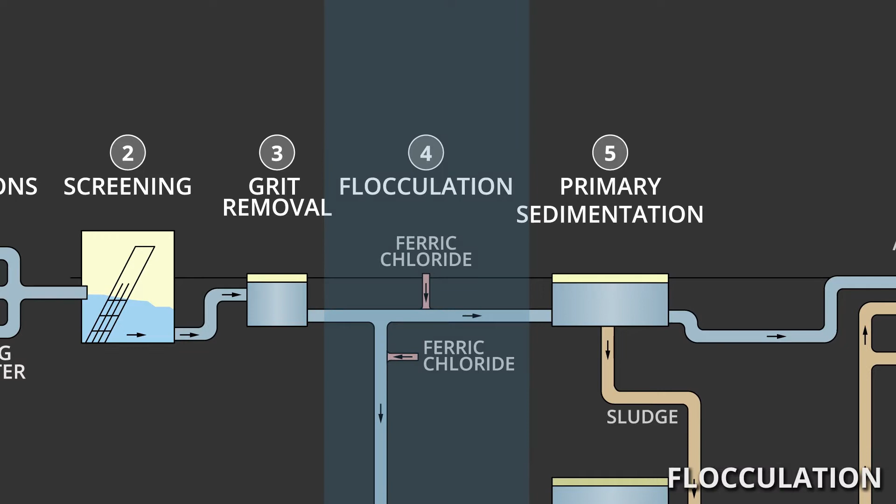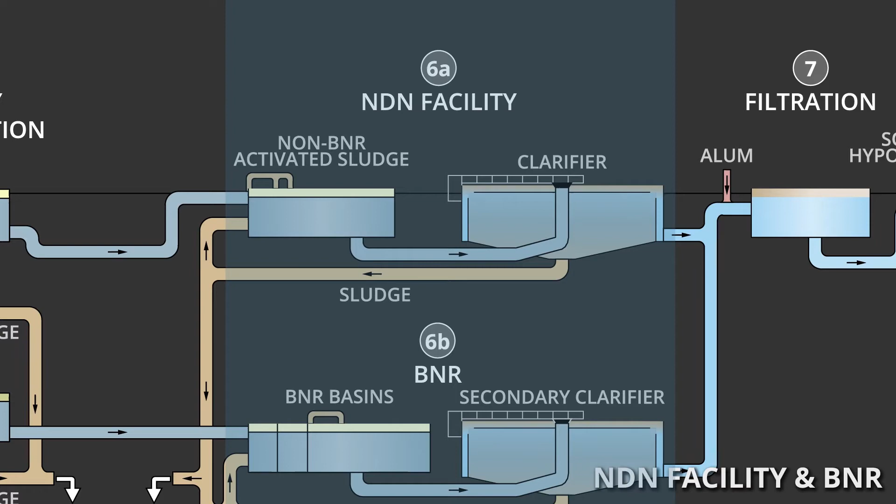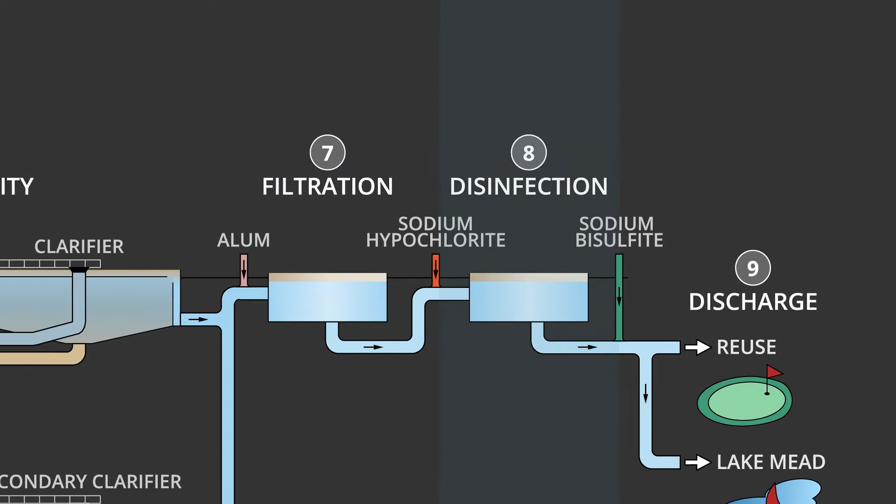Collection system. Screening. Grit removal. Flocculation. Primary sedimentation. Nitrification, denitrification facility. Biological nutrient removal. Filtration facility. Disinfection. Discharge.

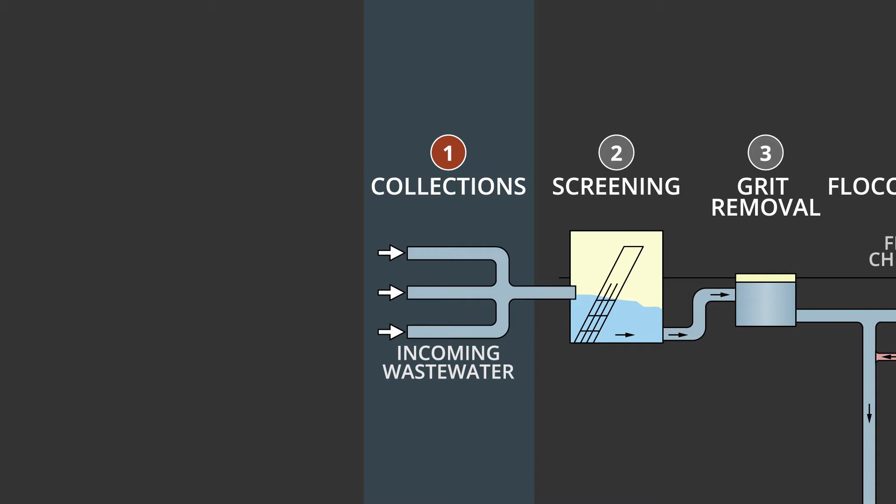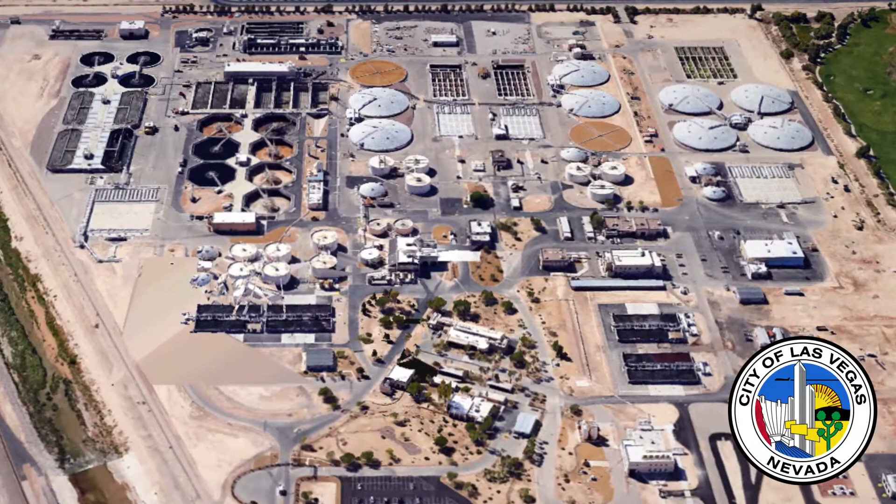Collection system. A maze of pipes collects wastewater from home appliances including clothes washers, dishwashers, kitchen sinks and disposals, toilets, and bathtubs, and from businesses such as restaurants, hotels, casinos, hospitals, laundries, car washes, and other light industries to deliver influent to the Water Pollution Control Facility.

Screening. Though this influent is 99% water, some debris also travels through the sewer and must be removed to protect equipment and the downstream process. To accomplish this, the WPCF plant process starts with the screenings facility.

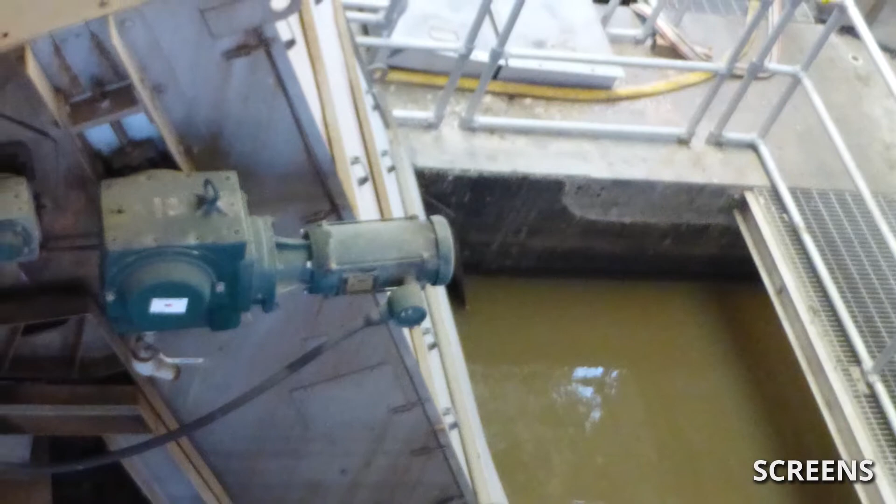This facility removes debris, including cans, rags, branches, leaves, trash, and other miscellaneous large items, when the wastewater goes through one of 5 sets of fine screens. The fine screens capture the debris contained in the wastewater while allowing liquids to pass through and enter the treatment plant, like a strainer. Debris captured by the fine screens is washed and then loaded into a truck for disposal at landfill.

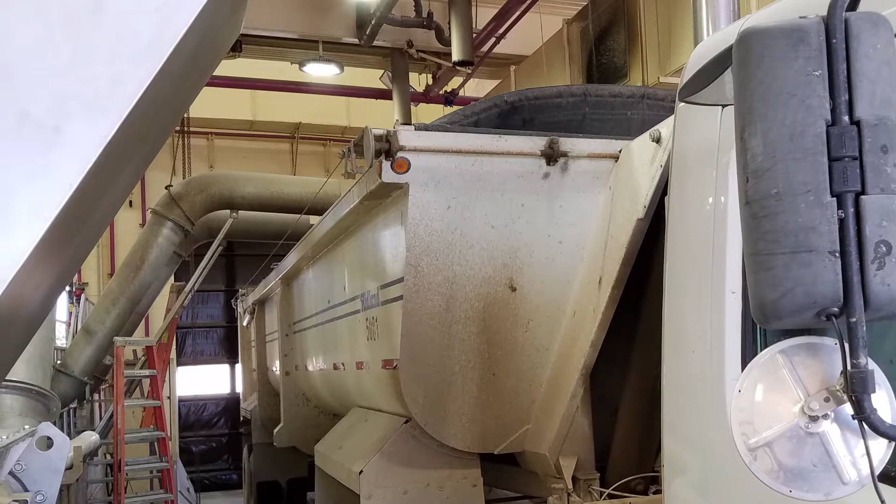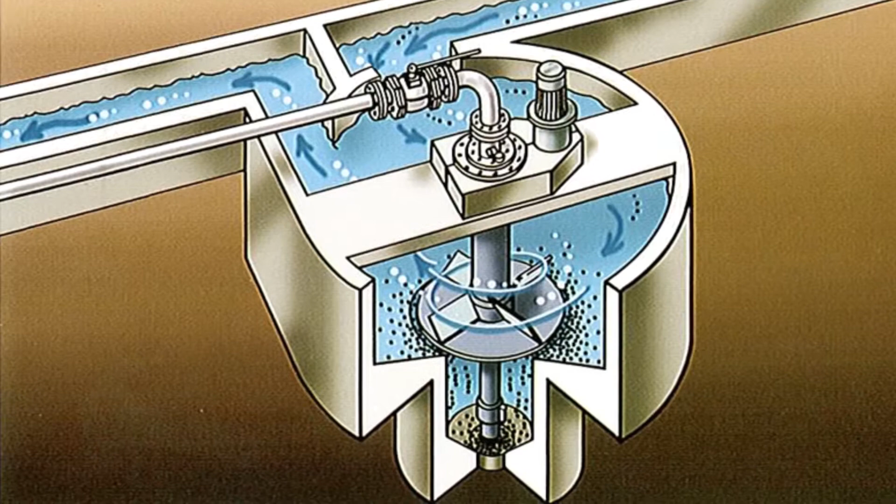Grit removal. The wastewater that passes through the screens still has very small debris like sand, gravel, and other material referred to as grit. If not removed, the grit could damage equipment, such as pumps, or settle out downstream and create clogs. The WPCF uses round grit removal chambers that spin the wastewater, creating a vortex that allows the small debris to separate from the wastewater. The sand and gravel is then washed and loaded into the same truck as the screenings and taken to a landfill.

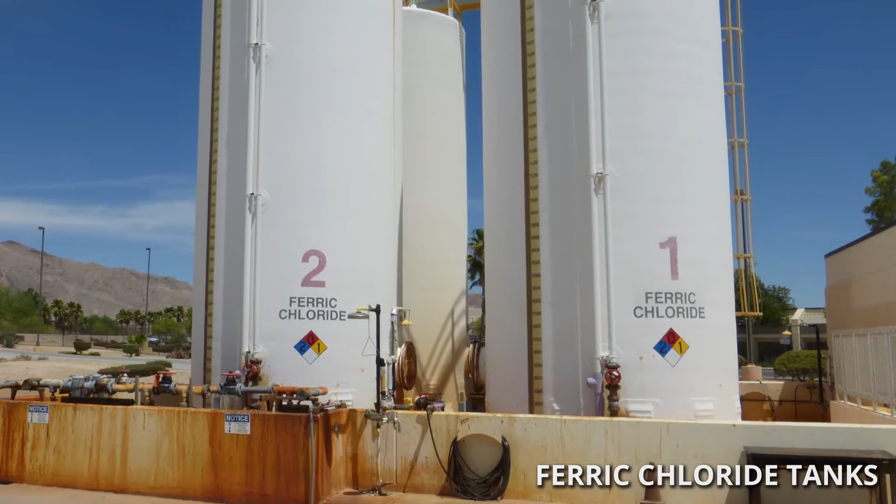Flocculation. Ferric chloride is added to the wastewater at this point to aid the small particles in the water to settle. The iron salt grabs particles in the water and creates a clump. The clump is heavier than water and will tend to sink.

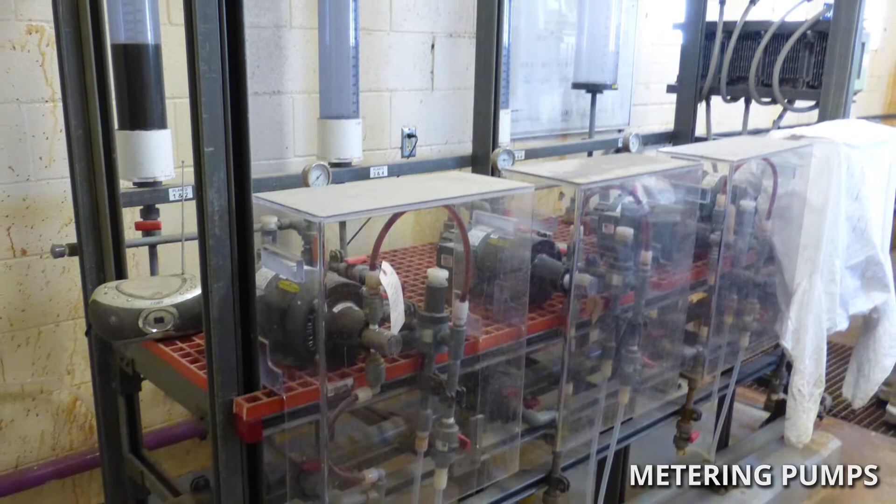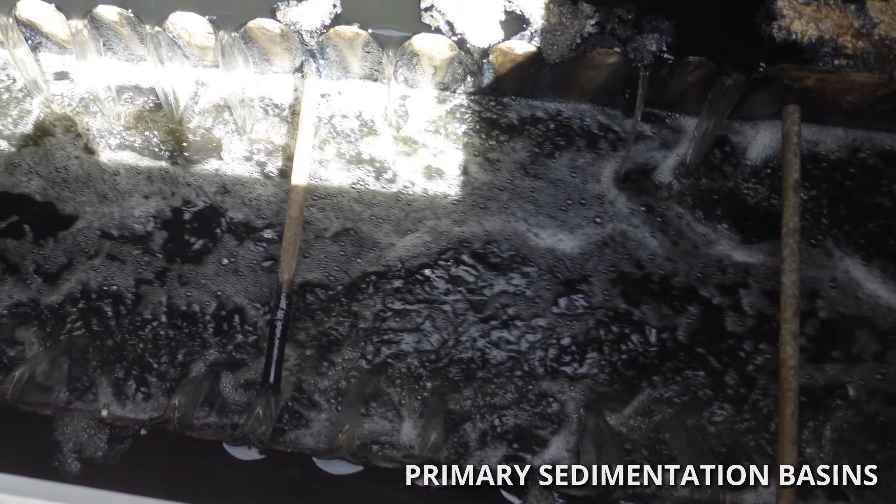Primary sedimentation. The wastewater and flocculants arrive at the primary sedimentation basin. Here, the water spreads out and slows down, like a stream flowing into a lake or pond. The slow-moving water allows the clumps of particles to settle to the bottom of the basin where it is scraped off and taken away. These clumps are now called sludge. The sludge is collected and moved to the solid side of the plant.

Wastewater that leaves primary sedimentation is now about 80% cleaner than when it entered the WPCF, and can be pumped to the nitrification-denitrification facility or the biological nutrient removal basin.

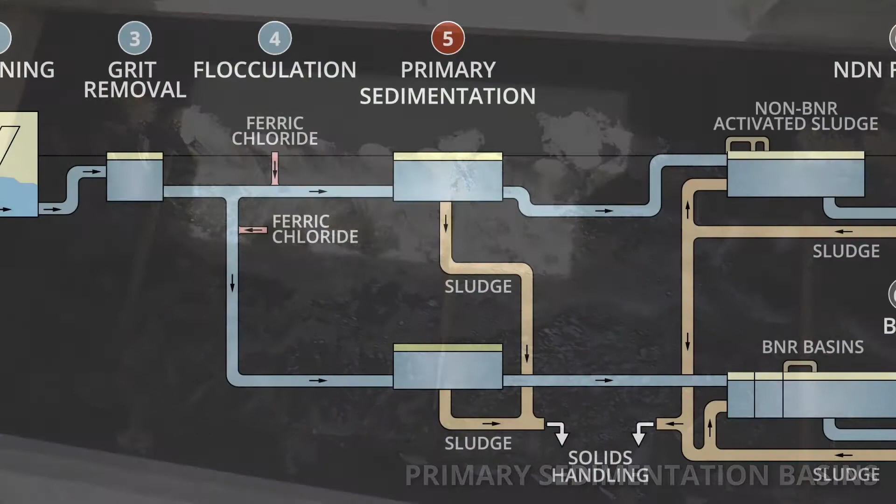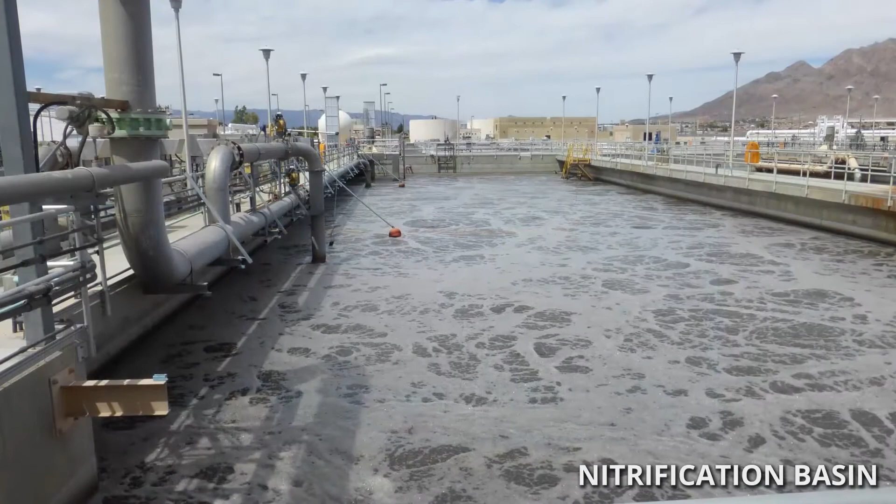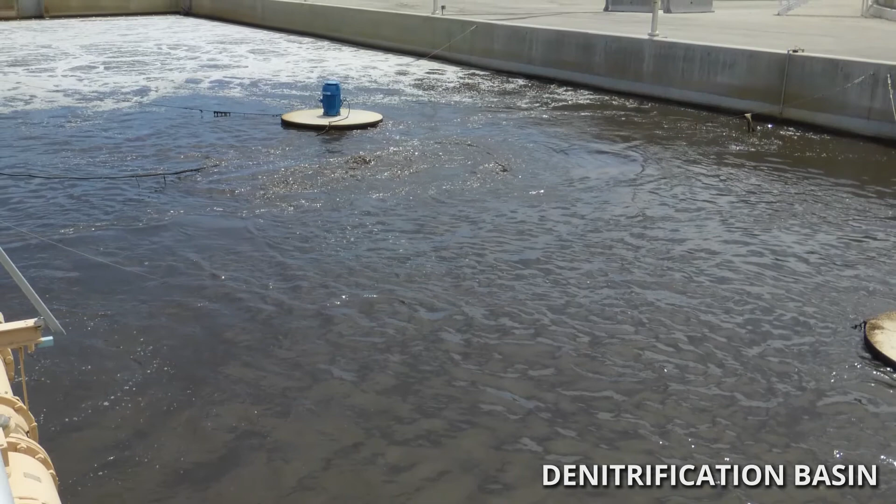Nitrification-denitrification facility. Wastewater from the primary sedimentation basins is pumped into the nitrification-denitrification (NDN) facility basins where it is mixed with microorganisms and air. Think of it as a turbulent, tumbling stream. The microorganisms eat nutrients in the wastewater for their biological processes and to grow. These healthy, growing microorganisms collectively make up activated sludge. The activated sludge gets rid of much of the nutrients in the wastewater.

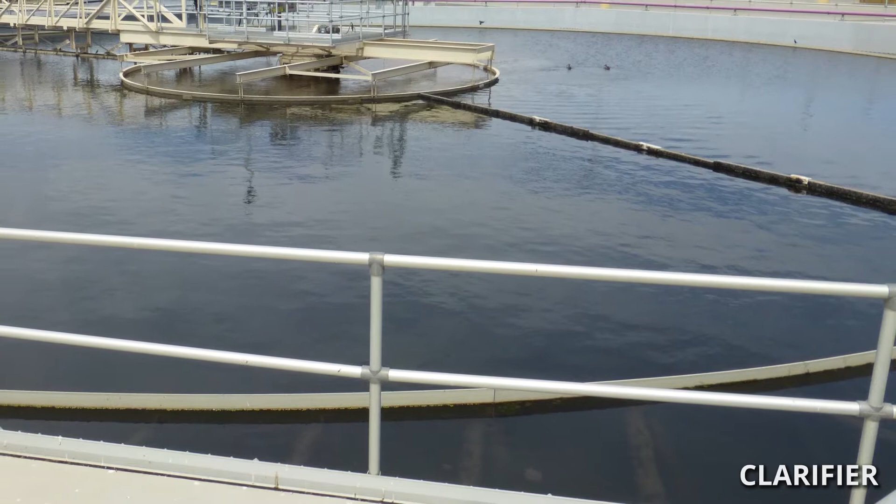After the NDN basin, the water and activated sludge flow into circular clarifiers, where the activated sludge settles to the bottom. This is because the microorganisms are full of nutrients and heavier than water. Some of the microorganisms are returned back into the NDN basins to breed more microorganisms. The rest is sent to the solid side of the plant. The result is very clear water that flows on to filtration.

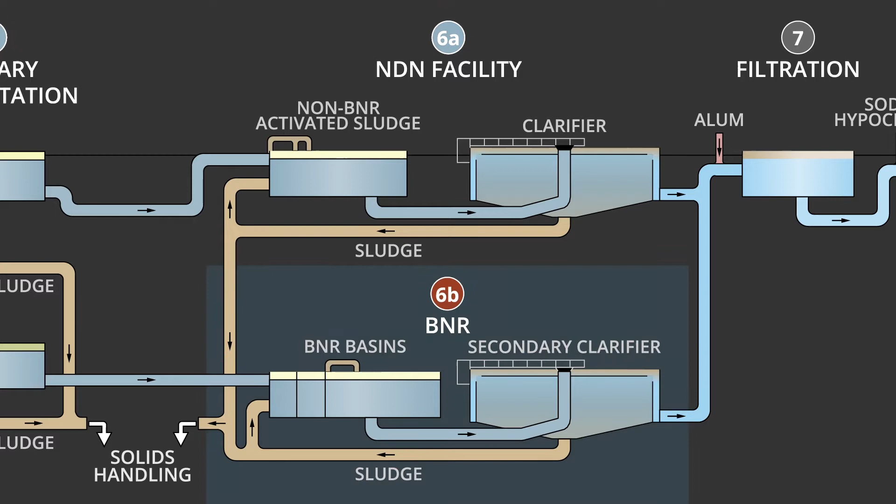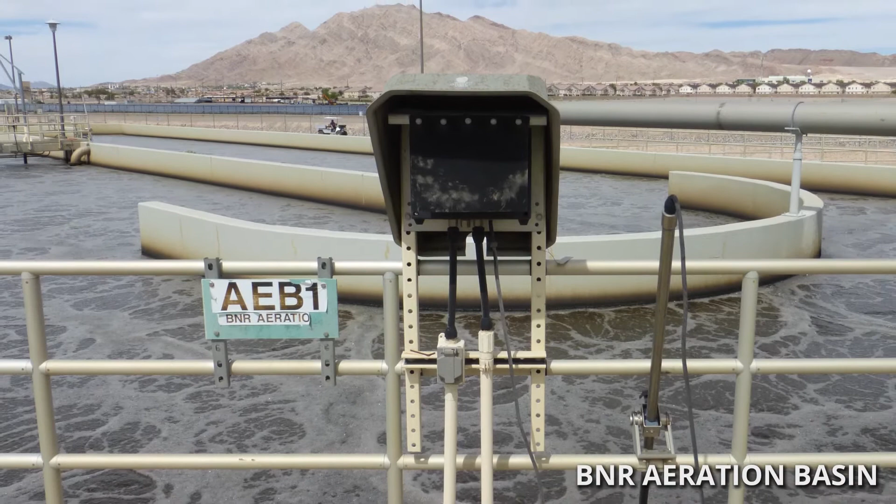Biological nutrient removal. Biological nutrient removal, BNR, is an activated sludge process that operates in a similar manner to the NDN process, but goes further to remove more nutrients. The BNR microorganisms are subjected to different water conditions, lots of oxygen, little oxygen, and no oxygen, which enable them to serve multiple functions. These include the removal of phosphorus, organic material, ammonia, and nitrate.

After the BNR basin, the water and activated sludge flow into circular clarifiers, where the activated sludge settles to the bottom because the microorganisms are full of nutrients and heavier than water. Some of the microorganisms are returned back into the BNR basins to breed more microorganisms. The rest are sent to the solid side of the plant. Like the NDN, the result is very clear water that flows on to filtration.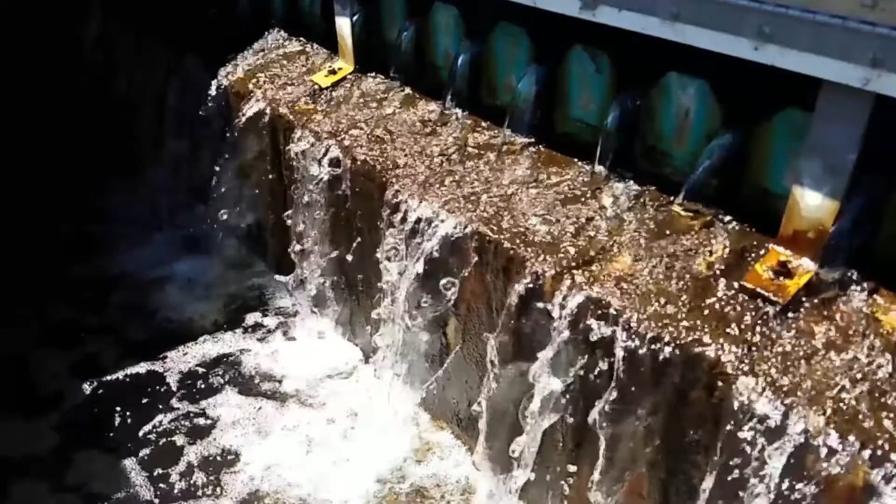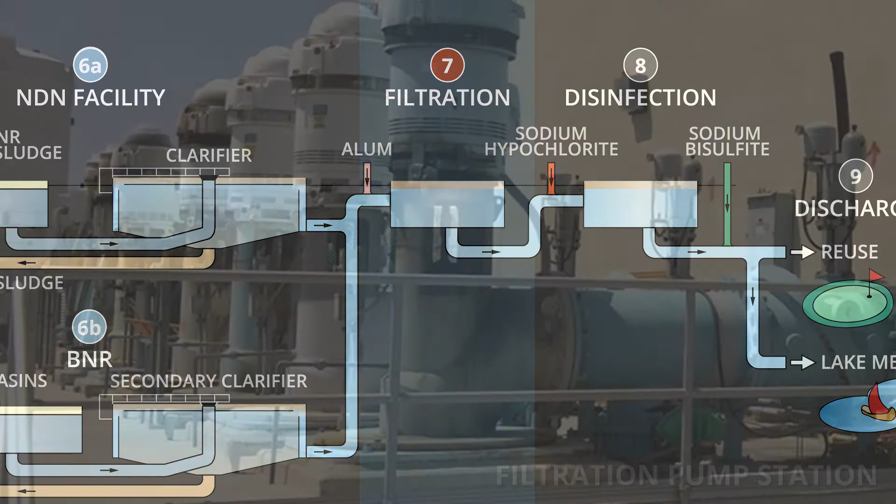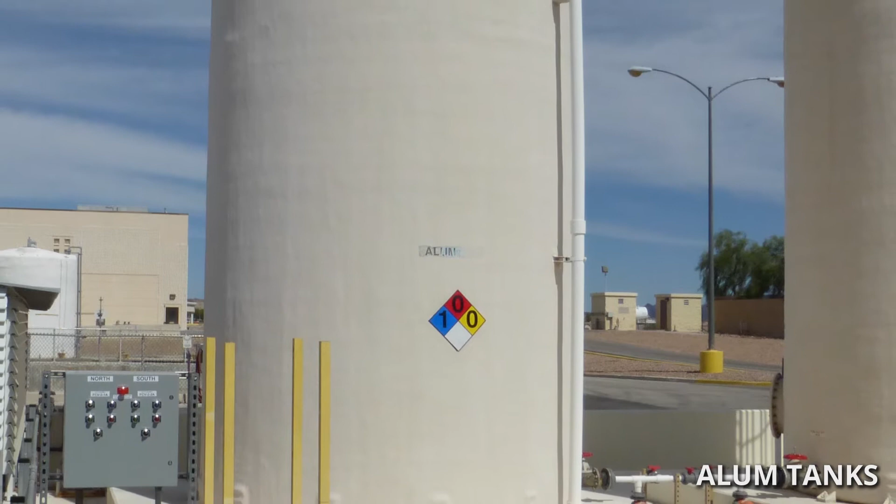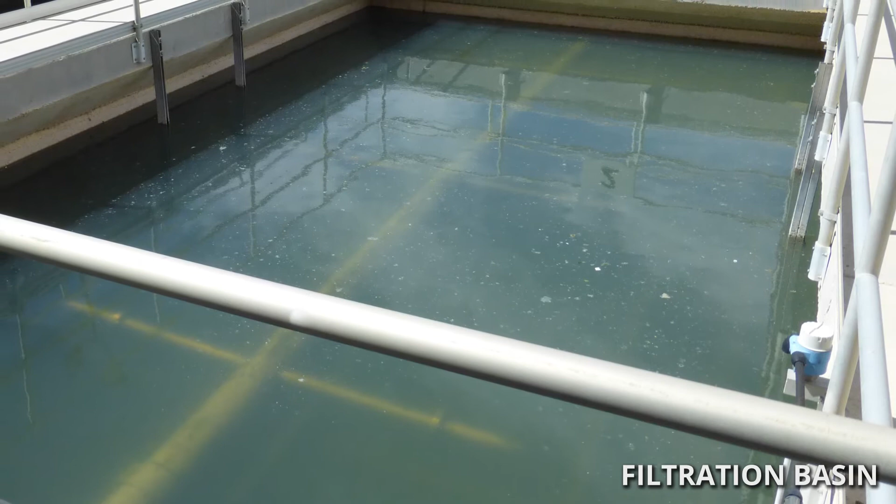Filtration facility. Clear water from the NDN and BNR is pumped into the filtration facility for filtering. Alum is added to assist in removing the remaining fine particles and phosphorus. In filtration, the water flows down through anthracite, a crushed coal product, fine sand, and gravel to capture solids, much like a sand swimming pool filter.

Clean water flows on to disinfection. The captured fine particles are backwashed out of the filters and returned to the primaries for reprocessing.

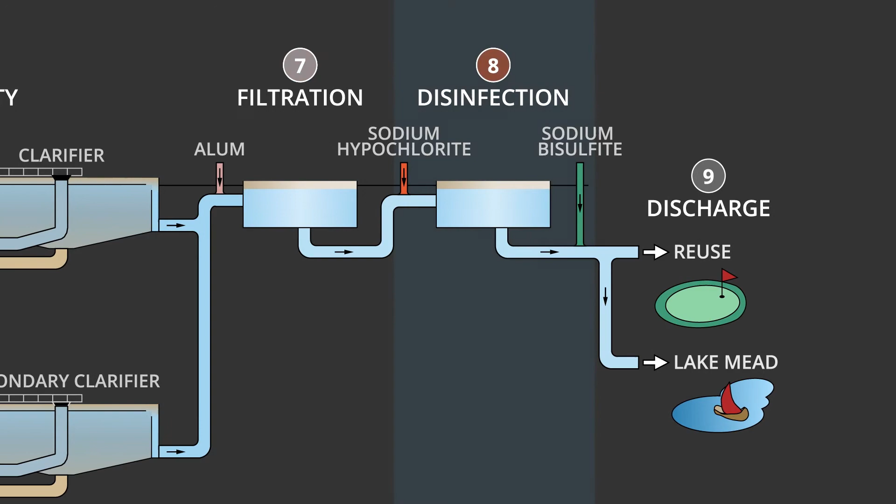Disinfection. The filtered water is disinfected with sodium hypochlorite, extra strong bleach, in chlorine contact basins. This very lazy river ensures the bleach is in the water for at least 45 minutes. The concentrated bleach solution kills harmful microorganisms.

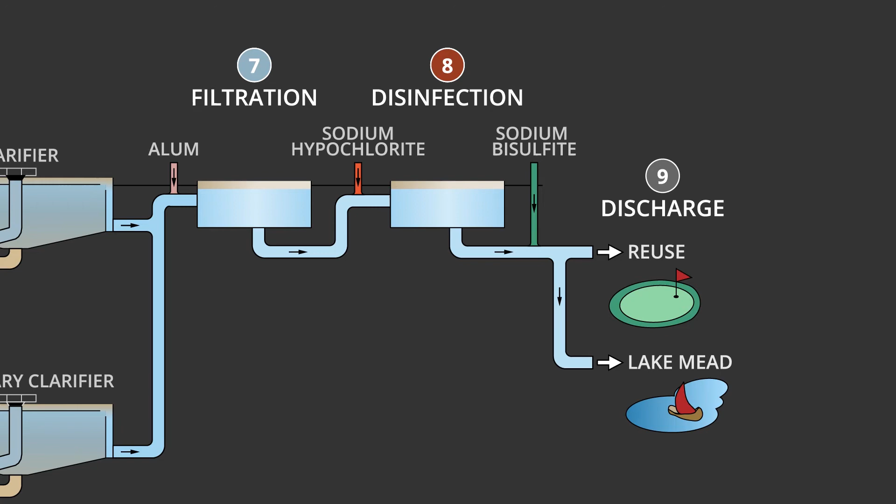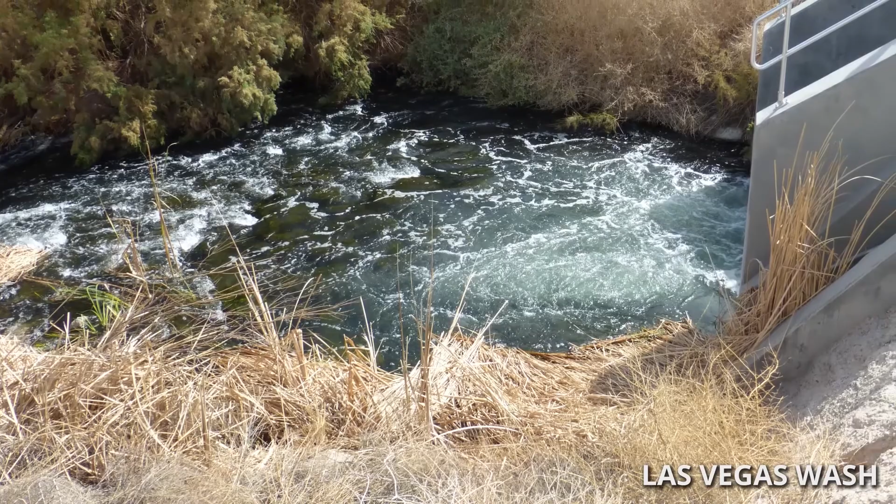Discharge. Water that will be reused on the plant or sold to golf courses is pumped away at this point. Water that will go into the Las Vegas wash and ultimately back to Lake Mead is dosed with sodium bisulfite to neutralize any remaining bleach.

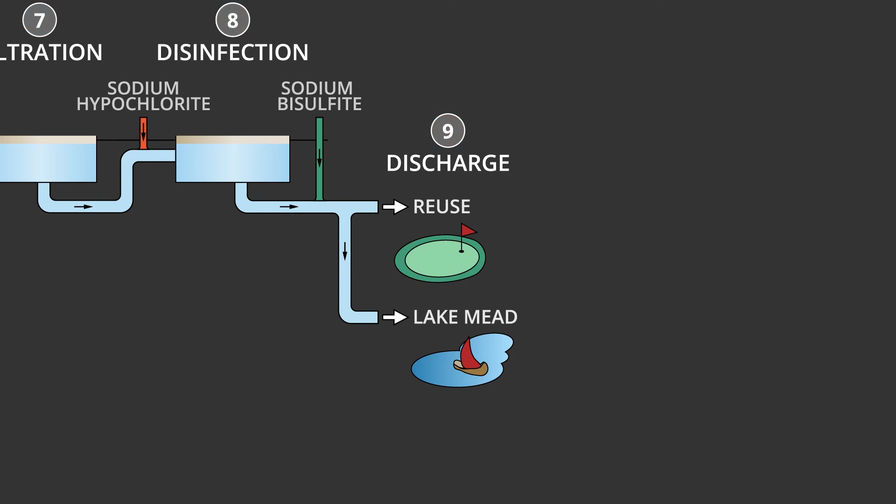The entire process from collection to discharge is regulated by the Nevada Division of Environmental Protection, NDEP, and the Environmental Protection Agency, EPA, through the National Pollutant Discharge Elimination System, NPDES, permit, and Clean Water Act regulations.